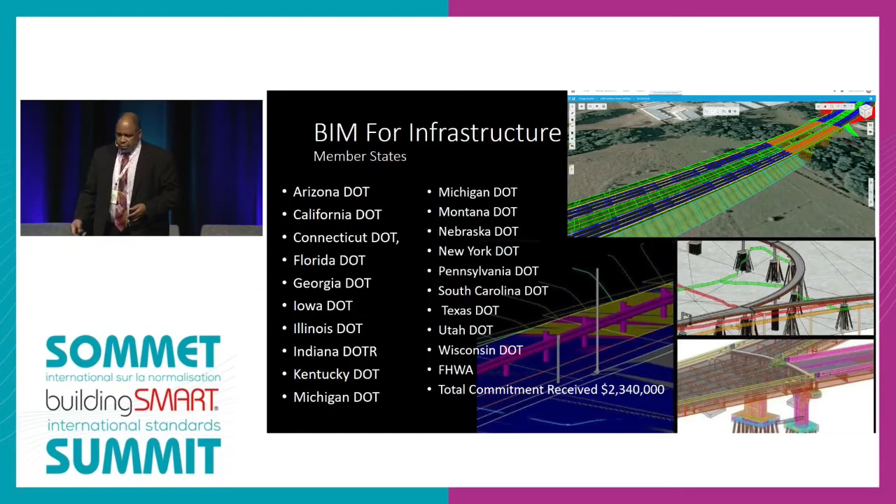One of the things the work plan relies heavily on is the Advancing BIM for Infrastructure Roadmap that FHWA produced about 2 years ago. There's a lot of good information in that if you're ever looking for a resource on how to get from here to there. The screen gives you an overview of what's in it, and it's got a really good approach for developing a digital workflow. I think it would be a really good resource for anybody looking to move down that road.

One of the things we often talk about is the importance of R&D in this effort, because R&D is critical. But R&D doesn't mean what you think it means, at least not when we talk about it. When we're talking about R&D, we're talking about rip off and duplicate. If somebody's already done something, rip it off and duplicate it. As you guys look at how to move this effort along, I would strongly encourage as much R&D, rip off and duplicate, as you can, because there's no sense going through the same pain many of us have already gone through to get where we are. If you can learn from our mistakes and build on our shoulders, or conversely we can build on yours, all of us move along and all of us benefit.

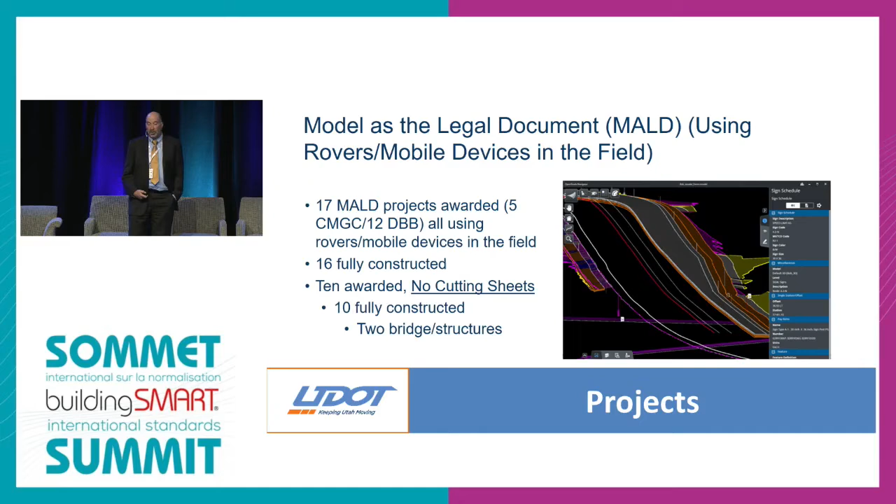Of those 17 projects, 16 are fully constructed; in fact, I think the 17th has now been fully constructed too. 10 of those projects we awarded, we did not cut any sheets, so we went directly from design to construction using mobile devices in the field. Of those, 2 are bridge and structure projects.

Our model use cases include design review. On those 17 projects, frankly, we did not use it on all of them—we had to figure out different ways because tools weren't available the way we needed. If we had sheets, we were probably using that methodology in the review phase instead of mobile devices. But as tools have become available, we're now using the model, including tools from Autodesk, Bentley, and Trimble, which augment or supplement what we're using from Esri for our GIS.

We use it for quantities—exporting quantities and making that information much more useful when transferring it to construction. We use it for clash detection, which is super helpful to avoid change orders we might get in the field. Contractors are using automated machine guidance with the models we give them—not directly, but through Land XML or something similar—and open standards will help that significantly.

In the field, we have viewers. We've used several different viewers, and I'll get to that in a second. Since we're not using sheets anymore on these projects, we need viewers out in the field that both contractors and our construction crews can use. Right now it's limited inspection recording—we're using different software, but we want to get to one solution. Probably the biggest complaint we get is that our crews like this, but they have so many different tools to switch between that they beg us to just give them one tool.

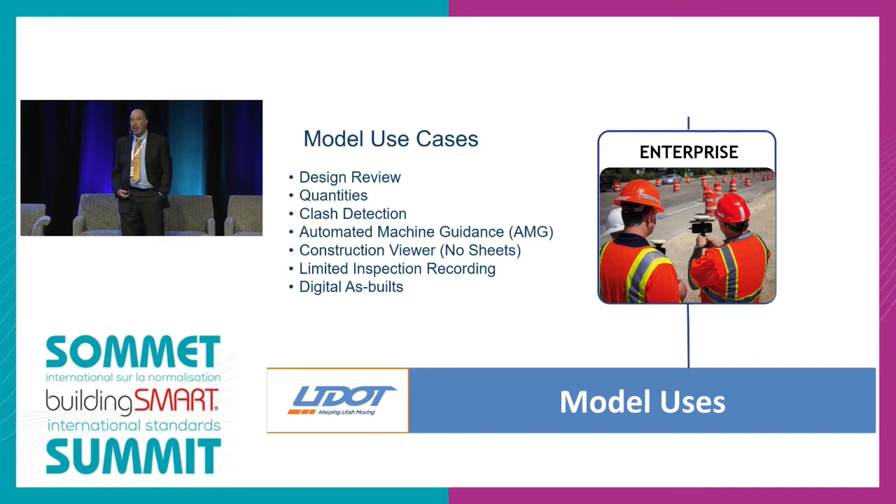And then digital as-builts—that's one of the things we're working on right now, trying to actually define what that means and where we're going to put that information when we get it back.

In design and construction, the tools we've been using include Autodesk, Bentley, Trimble, and various Esri solutions. For Autodesk, we've used Civil 3D. We are not an Autodesk state from a DOT perspective, but we delivered a project using Autodesk products, Civil 3D and BIM 360, on purpose to see if we could move toward saying 'we just want this deliverable, use whatever software is most comfortable for you.' We use BIM 360 in the review phase as well as in construction.

For Bentley, we've used SS3, SS4, and ORD. We're currently using ORD and have a pretty sophisticated workspace. We've also used OpenRoads Navigator and Synchro in the field—both have been pretty successful, and the tools are getting much better.

On the pre-construction side, we've used iTwin Review on 4 or 5 projects, and that tool also looks like it's going to be great. We have a live project right now—a big one, about $50 million—using iTwin Design Review for plan-in-hand in about 2 weeks.

With Trimble, we don't use Trimble Business Center too much—our contractors do—but what we have piloted is Site Vision, which we did in 2019 before it had the ability to bring over attributes and such. That tool looks like it's going to be fantastic as well.

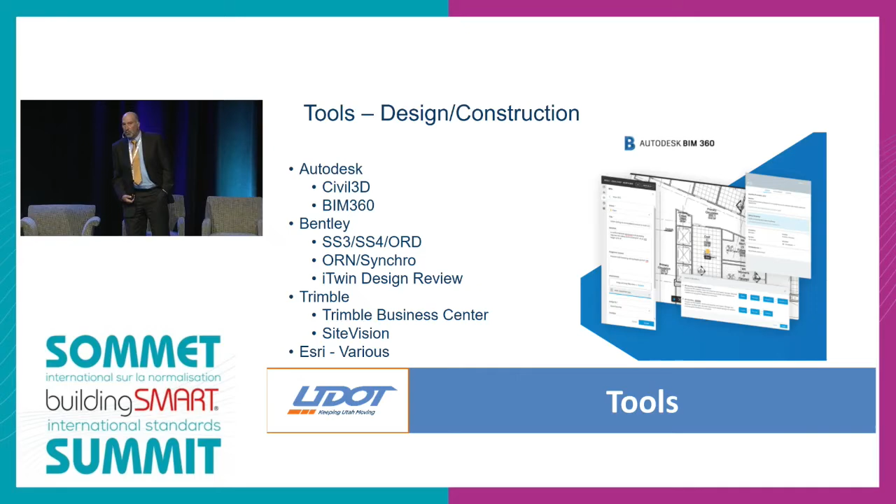We've used Esri on a lot of our projects. To us, that's the tool we can be very confident in—if for whatever reason one of the other tools doesn't work on a pilot, we can pivot to it. It's not perfect; it's a 2D solution, so we have to make sure crews have cross-sections, elevations, profiles, and other 3D solutions. But we feel like we can put those in the hands of our crews without sheets on pretty much any project.

For data and file exchanges in pre-construction, essentially our biggest challenge was naming conventions for contractors. They said it was taking anywhere between 2 to 5 days just to figure that out, and then another couple of weeks to figure out how to put those files back together. Our contractors are probably 95% Trimble, though they use other software as well, and they said it would take that much time within a 25-day advertising period. So that's a huge deal—making it so they can put that model back together.

If we had open standards and they could just open up right away, that would reduce time significantly. With the work that we've done, we've gotten to the point contractors say now it's between a half a day, or on a very challenging project, maybe 2 days, they've got it all put back together.

For advertising, we use ProjectWise, BIM 360, UDOT Project Explorer. We've used all of those on our projects. Our authoring software for the model is the legal document, and typically it's been either Autodesk or Bentley, mostly Bentley in our case. We've also had information-only files, and those are the ones that the contractors use.

In pre-construction, we've used OpenRoads Navigator for review, not too much. It's deprecated and we don't use it anymore. Bentley doesn't offer it. We've used PDF scroll plots to do reviews, iTwin Review like I talked about, BIM 360 which was extremely successful, and then GIS and Esri.

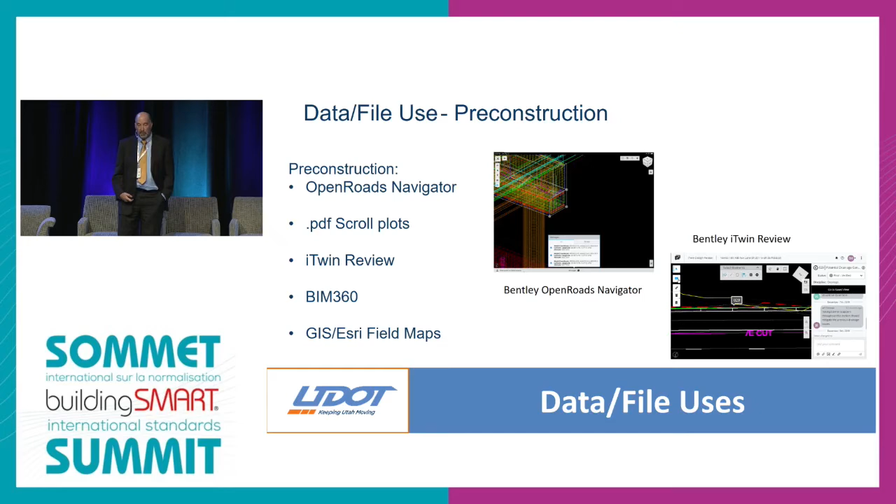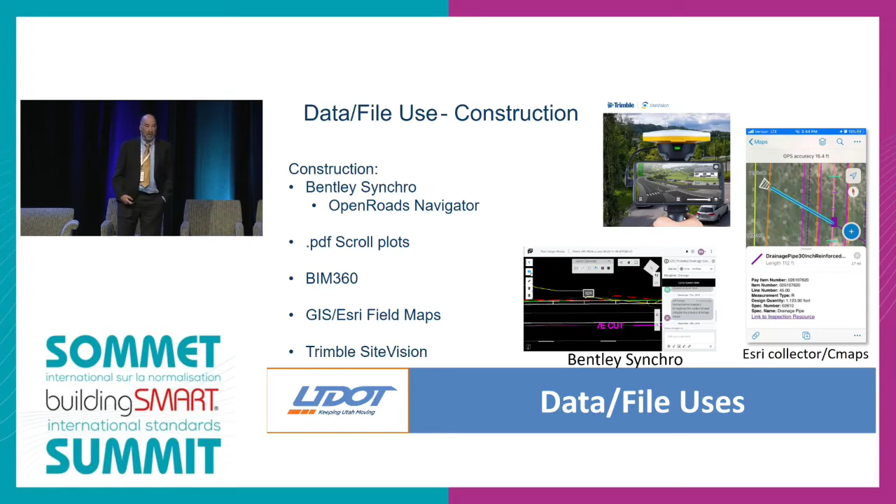Field maps as well. In construction, we've used Bentley Synchro. We also did use OpenRoads Navigator, but like I said, that's now deprecated. We've used PDF scroll plots, we've used BIM 360, we've used Esri significantly on these projects. And then Trimble Site Vision is one that we've piloted, but we have not actually used yet. I expect we will next year.

Our data file use - we have a CAD validation tool. We also have a CAD to GIS, which is FME and Esri. We have a geodatabase that we put it all into, and a piloting data. I'm going to run through this because the next screen I think is a better process for this.

So our designers take the DGNs, they drop it into a portal, and it checks to make sure that the CAD standards have been followed. Once that has happened, we can then put it into a CAD to GIS converter. We're using FME to do that extraction. And then as we do that, our inspectors can have those tools in their hand, and we can take that information and move it into that enterprise geodatabase.

Once we get all of the attributes and everything set and we get the as-builts, we can then move that into an asset management database. So we have concluded our first digital as-built, and we're in process of several others.

We have 3 unique databases. We have one that was done by a LiDAR run of all of our roads, and we had all of the above ground features extracted into a geodatabase, so we have the geospatial location with some attributes. We also have the information from the design that we have extracted with FME, and then we have a third database, which is our asset management database.

So the unique ID that we have in our asset management database, ADAM, along with the unique ID that's tied to our LiDAR system that we've extracted, along with the design, have all been put together.

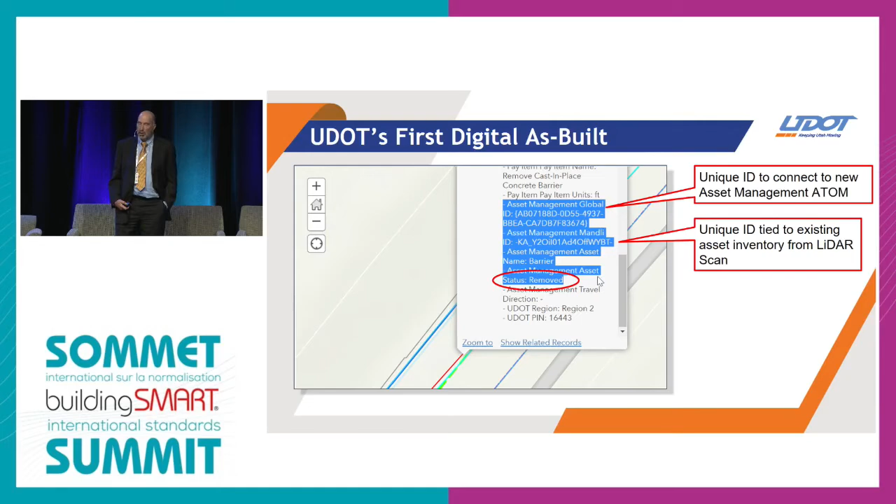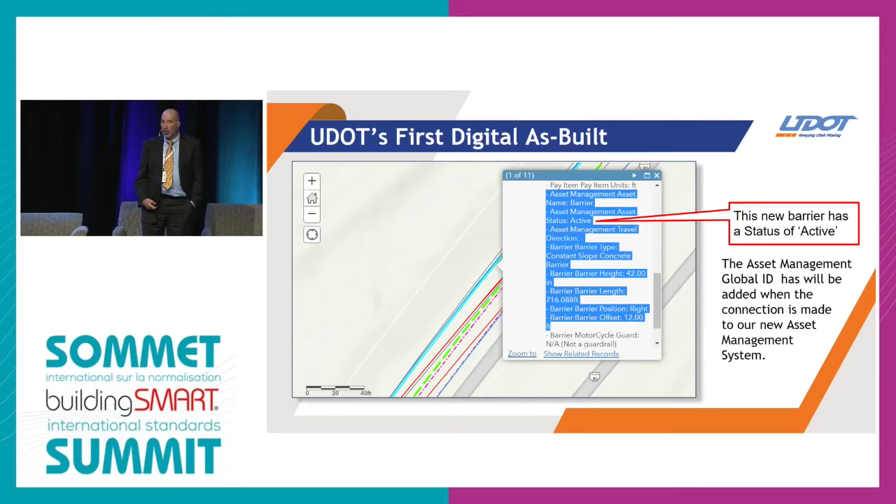And our first - this is a screenshot of our GIS. It shows that the statuses are removed. And then on the newer information that came back with the as-built, now that status is active or in production, so to speak. So we took the information, we updated the model, we did another extraction, and that created all of our data that we can move into our ATOM system.

But the basic thought is that we have the ability to exchange data from our digital twin technology, where we have all of the data for all of our assets. So we have to have an element schema for every single feature on our system. That's a huge, gigantic lift. Once we get to that point, then what we expect to be able to do is use open data standards to be able to exchange data with any other vendor.

As an example, the thought that we're thinking of - I'm going to give 2 examples. One is, we may be doing a review at plan in hand, and instead of saying we have to use tool X, we would say bring whatever tool is most comfortable for you, and then we've got the data in our digital twin technology, and you can use whether it's Trimble, Leica, Topcon, Autodesk, Bentley, or some other third-party viewer, or Esri.

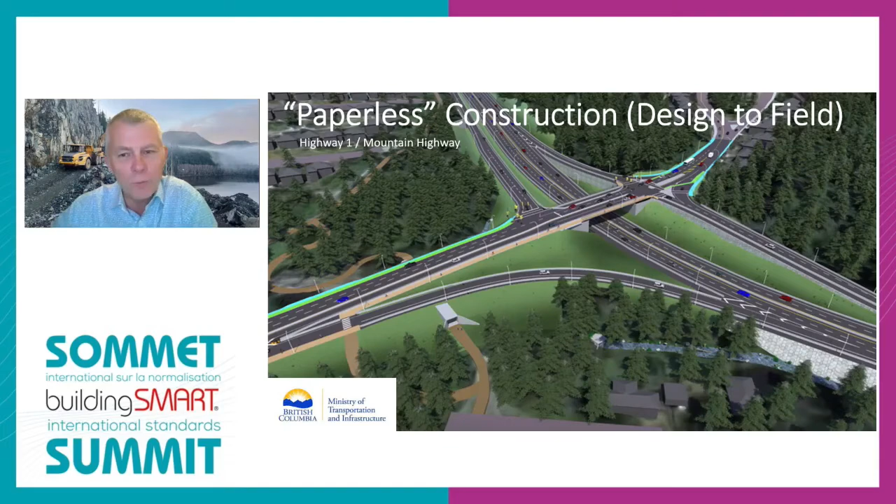The whole thing with having a great model is that you can move towards paperless. There's a path towards paperless design and construction.

The ministry has always put a high value on comprehensive standards and quality design models, because of the construction supervision workflow, which is elemental for all road and highway projects in the province. This construction supervision is carried out by the ministry's field services division. So we've got the geomatics and design division, and then the field services division.

Essentially all contractor payments are based on measured quantities. That's because we're lucky if we get a borehole every 100 meters. We can assume a rock horizon, but there might be some earth on top of that, and the actual surfaces are very often going to be different than what the designer was able to design to.

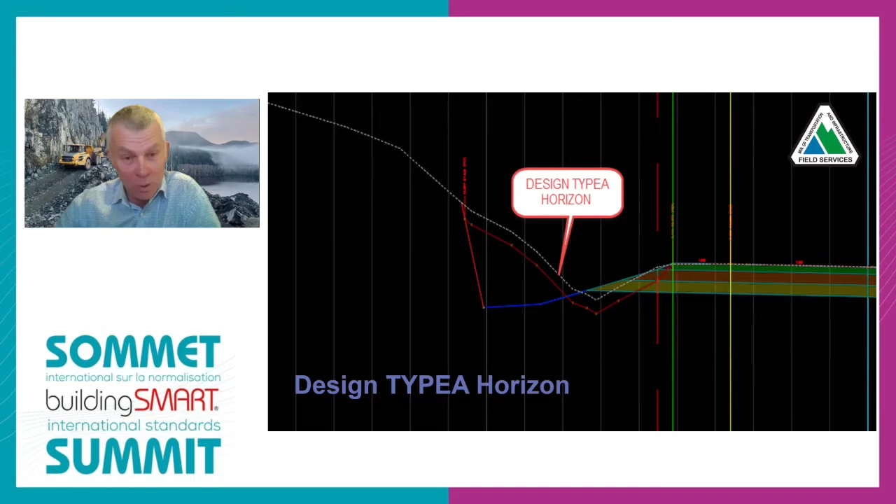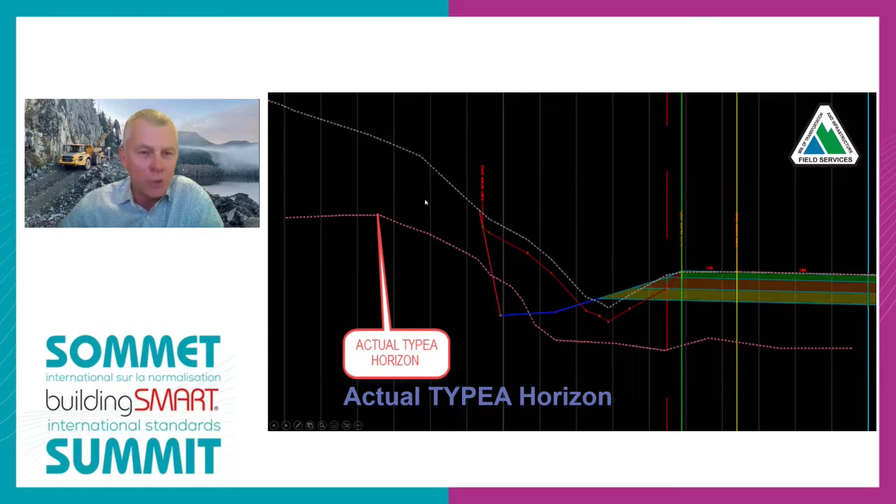Another interesting component is that the design models, our corridor models in Civil 3D, are actually rerun against the actual horizons. In this slide, you can see a cross-section where the designer assumed a rock horizon, a type A. But when we start getting out in the field and doing our excavation, we can see that this area is the actual type A horizon, and there's earth, or what we call type D material, above that, which changes the cross-section.

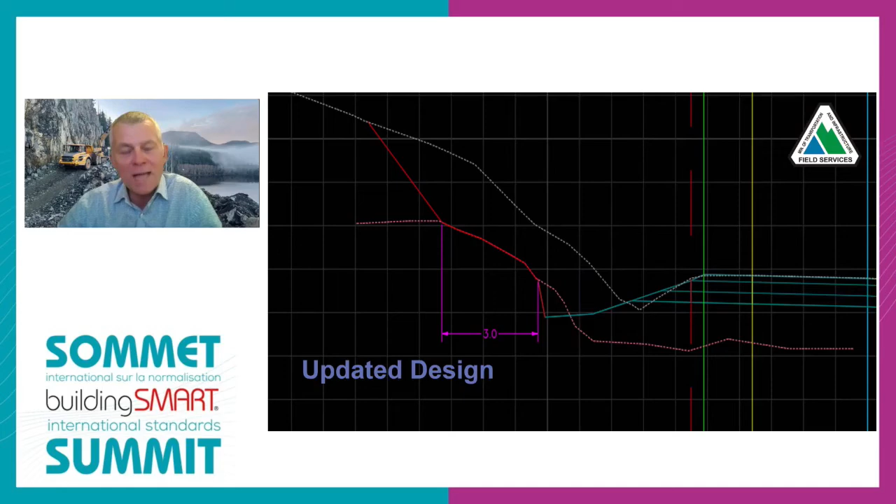It lets you know what your grading, your modified grading impacts are going to be, and also, more importantly, for payment for the contractors. So it's about what is actually being done versus what was designed, dealing with those discrepancies.

The field services construction supervision workflow also conducts surveys for spot, linear, and area quantities, and QA on the contractor layout. This is all about having the data.

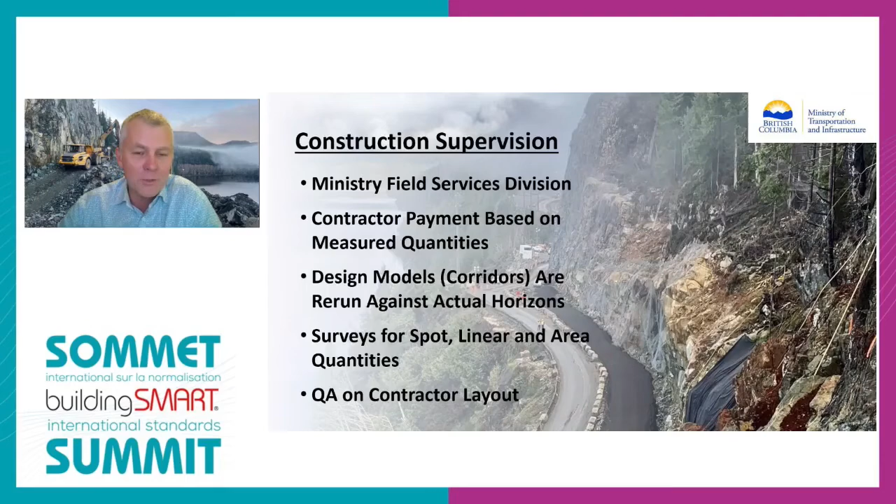To facilitate construction supervision, we put together a Civil 3D terms of reference for the geomatics and design workflows. Before I started this work, the same terms of reference document existed for Civil 3D's predecessor, and it was all to support the handoff of data to the construction supervision team so that they could do their work properly.

I talked about the contractors recreating digital data from hard copies, and I actually got mixed up on my slides, but I'll talk to the other point I meant to talk about now.

When I saw the level of detail that went into the sub-assemblies we're developing for our typical cross-sections, and I started seeing these models produced, I approached the then head of geomatics and design. I said, you know what, you guys are in a really good position to go full BIM by taking the design data.

Forgetting about production drawings and moving that data to the field. Obviously it's a long path, 5 to 10 years, whatever it is, but a colleague of mine from Bulgaria was telling me that's the way they had constructed projects - they weren't using construction drawings. It's really interesting to see the light bulbs go off when you see the quality of these models.

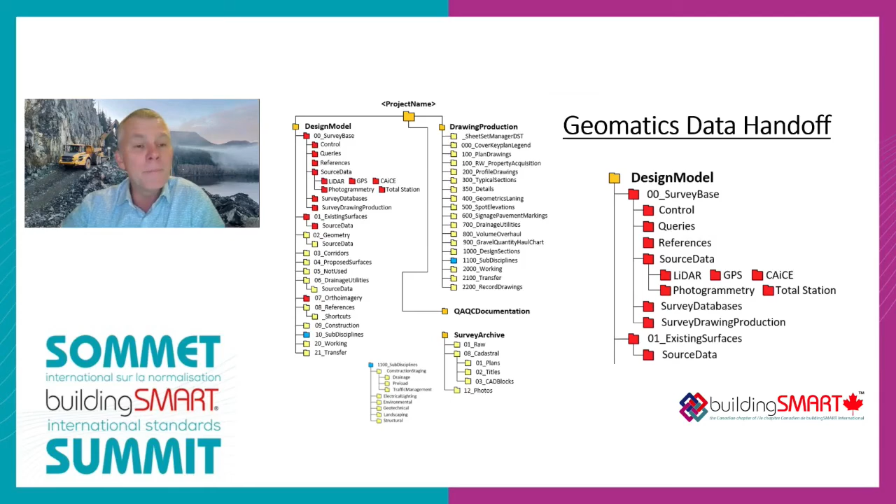What you see here is our folder structure for a typical project, our standardized folder structure. We've separated this into design model drawings and production drawings, and the red folders are the surveyors' folders. Essentially that whole folder structure gets zipped up and sent over to the designers, and if there's any addendums or updates, you just take the whole folder structure.

Let's look at some of these CAD standards, applicable design, same thing, folder structures, drawing names. How are you supposed to represent a feature? Is it an alignment? Is it a feature line? Is it a polyline? Is it a line? Layers and block definitions, naming conventions for alignments, profiles, and corridors.

A lot of that was already in place, so from CAiCE, custom subassemblies, corridor region names, design surfaces and material names - all standardized. That's a big one right there: cross-section point coding. All of the key points on the cross-section have standardized names. Therefore, if you're working with that data from a construction perspective, you know exactly what the PSH is, the PD1, the PD2, the POT, whatever. So all of those cross-section codes are standardized.

Drawing production standards, so the look and feel of the drawings is always the same, and once again, providing tools and training. So this is where things got tricky now - the handoff to the construction supervision team. Let's just talk about the technical highlights here.

This is important: our data is all shared in that entire folder structure. There's no duplication of data, so that means all of those changes can propagate naturally through all of the dependent drawings. This is another big one here - the production drawings source the data from the design model drawings. They're fully connected, and that was a requirement right from the get-go.

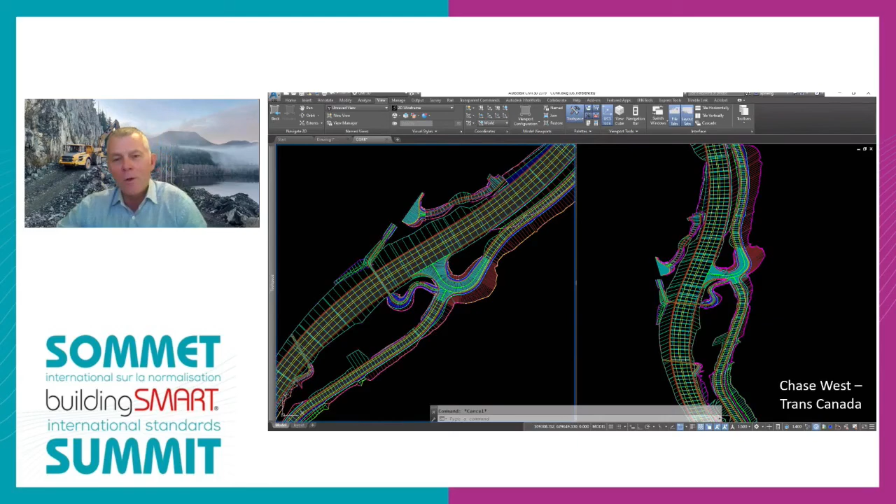This is a project that's just finishing up construction. The design models are great. They're tight, they're accurate, they're correct, they're representative. And it's amazing that when you see these models, what we can actually do.

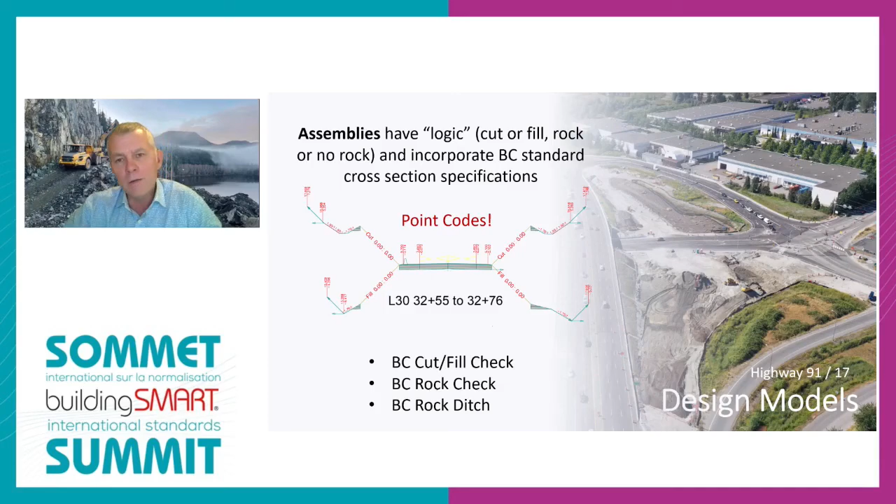And then the assemblies I mentioned have logic built into them, so we can check for cut or fill. We can check on whether or not there's rock. If there's rock, insert a rock ditch with a 1/2 slope. And I mentioned the point codes there. So all of these tools and sub-assemblies for doing the design are provided to the consultant.

So we're reviewing the data at 90%. And we just check for standardized items here: object naming standards—that's a big one—constructability checks, and tender data exports. So that's done at 90% detailed design. And I mentioned that the consultants are contractually required to adhere to the terms of reference.

Okay, so handoff to construction supervision. We didn't want the construction surveyors to have to know Civil 3D. Their tool now, and this is all just happening, is Trimble Business Center. So we essentially provide data from the design archive to the construction supervision team. We're not into IFC yet, but it is application neutral in that it's XMLs, PDFs, and DWGs. And we've got templates in TBC that can consume all of this data so there's no reliance on the supervision teams having to use Civil 3D.